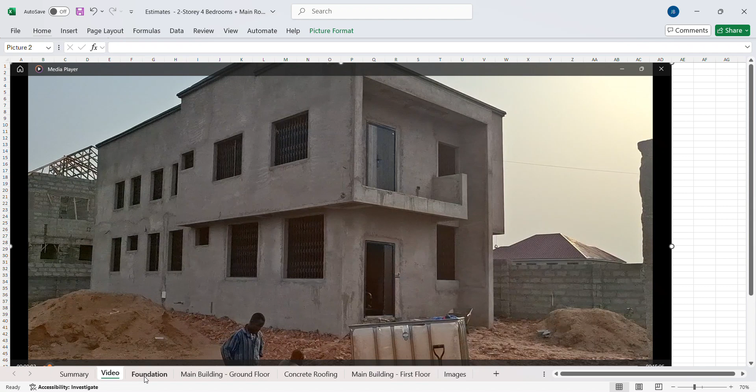So I uploaded a video of the building that you see in your shot on my YouTube channel, and I got a lot of chats, WhatsApp messages asking for the estimate. Indeed, I had promised in the video that I was going to share the estimate with you. So I'm going to go into the detailed estimate. I have the summary here, but before I get into the summary, I would take you through some images here.

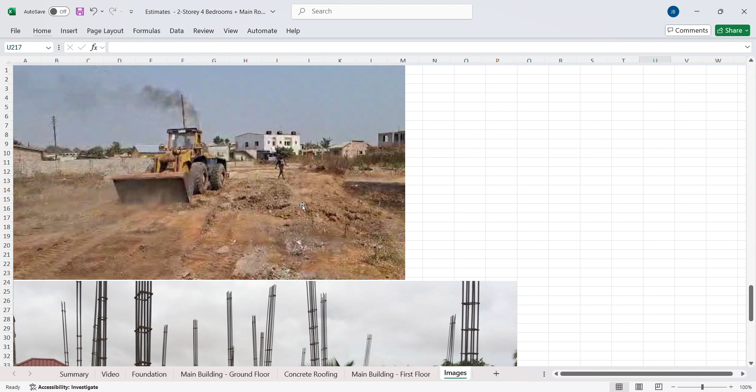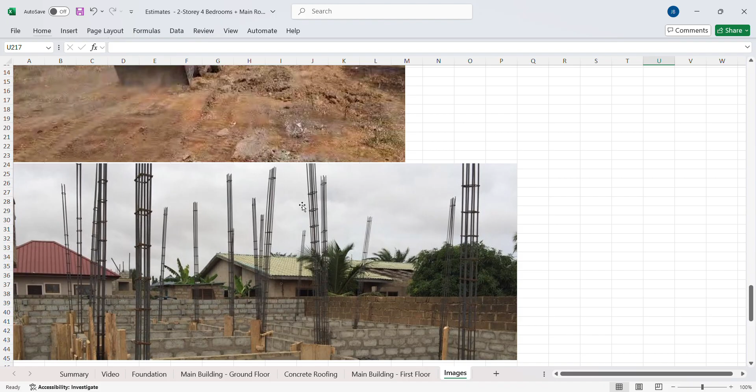Typically, we'll start the project off with some excavation works, but before the excavation works, we would have to grade the land. We have to clear and level the land. So this one will come with a cost. After that, we do the excavation. We pour what we call blinding. So this is the excavation that you see.

After the excavation works, we'll pour some concrete in the holes, and then we'll lay the blocks that you see in your shots. After the blocks, we would cast all the pillars. So I don't want to bore you with a lot of these details. Let's get into it. So typically we'll start by getting a trip of sand, a trip of stones. We'll buy some wood for the profiling. We'll buy some pickaxe, shovel, wheelbarrows that you can estimate to be about $800, which is 13,000 cedis.

And as I indicated, you are going to grade the land, very important, so that you get all your settings right. And there is a permit fee that you pay to the building authorities, so that is the assembly guys. And depending on where you are in the world, in my country, there are land guards everywhere. So before you start your building project, they are at your doorstep. The moment they see you with tools digging, they will come and collect what they call digging fee. So that you have to budget for. I have 2,000 cedis for them.

Then we have the profiling of the building. So this is where we set all the lines and say that, okay, these are the lines, this is where the blocks are going to pass. As you can see, there's a block here, there's a block here, there's a block there. That is the profiling. Then after the profiling, we have the excavation works. So this is where we dig the foundation itself.

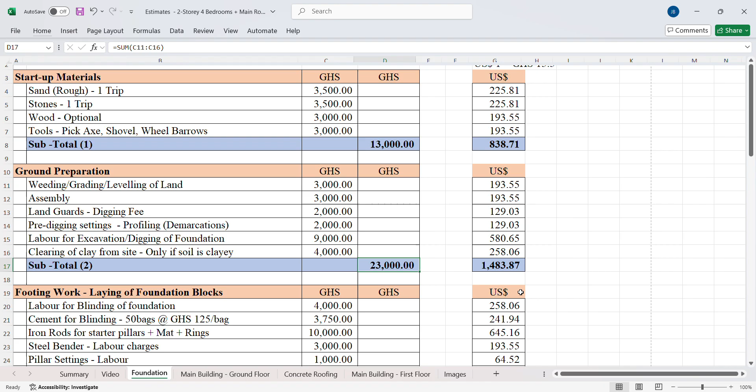Now, one important thing I always emphasize is if you do your excavation works and the land is clay, please clear all the clay from the site. If you look at your architectural drawing, you would find in there that the architect is saying if the soil is clay, please clear it from the site. So the ground preparation works is going to take us about 23,000 Ghana cedis to do, which is about $1,400. So we are building the estimate. I'll give you a very good summary of this.

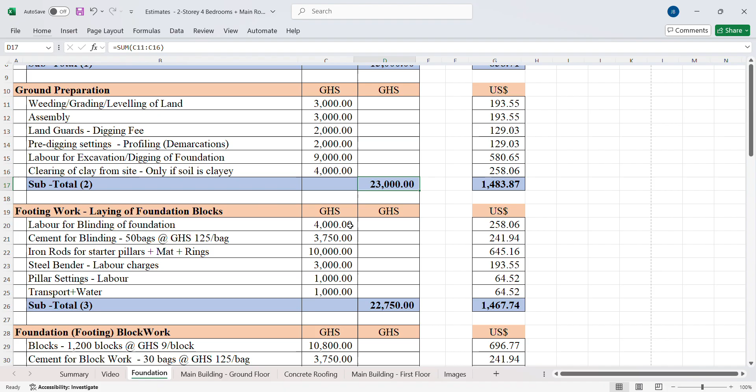Now, after that, you go to the footing work. So the footing work, we start with the blinding of the foundation. After the excavation works are done, let me just take you there. So after the excavation works, you've dug the trenches. You pour concrete in the holes before you lay the blocks. So these blocks that you see are sitting on top of some concrete we call blinding. That has to be done first before you can lay the blocks that you see in your shots. So once that one is done, then you can go ahead and lay your blocks.

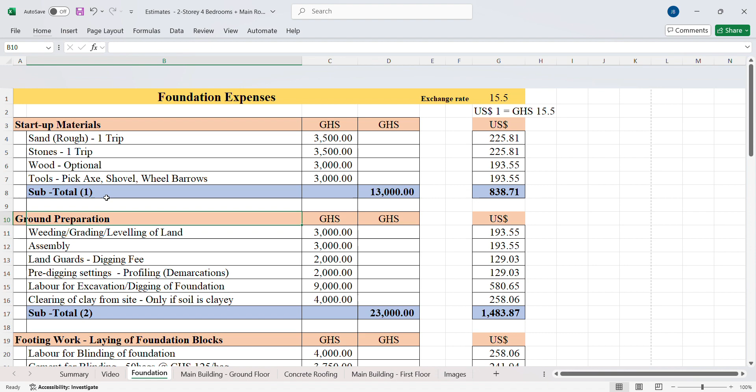Now the blinding, you would need some cement for the blinding. As I mentioned to you, it is concrete, but the sand and the stones, you have already bought them from the startup materials that you see at the top there. You have bought your sand and then the stones. So you would use that to do your blinding works.

And then you will need some iron rods. If you look at the image that I showed you, you see we have some iron rods in there. So this is the foundation that we just did. So this is the footing. We call this the footing works. So the footing works, you will need to put iron rods in there. So that comes with cost, and that is 10,000 Ghana cedis.

A ton of iron rods is 9,200, but you buy some 12 and it's a mixture of 12 and 16. The 16 is what we use for the columns. The 12 is what we used for the mats. The mat, you see mat in there. Then we buy 10 for the rings. So the rings will be 10.

So let me take you to the image again. So now here you see that there are rings on the columns that you see. And if you look at the bars, they are all 16. This column is 16. The column that you see is 16, and then the columns that you see sit on something we call mat, and then the rings around it, which is 10 mm.

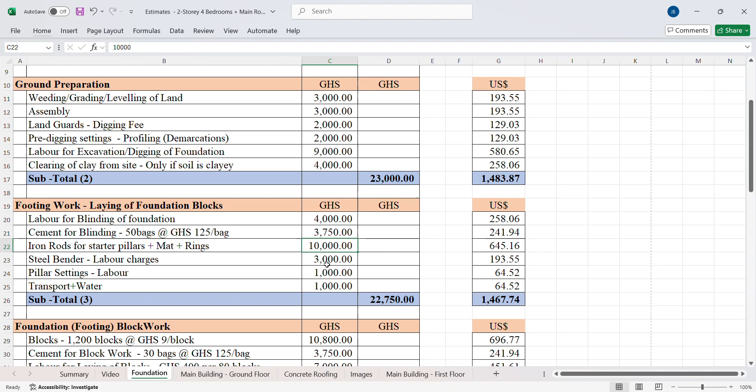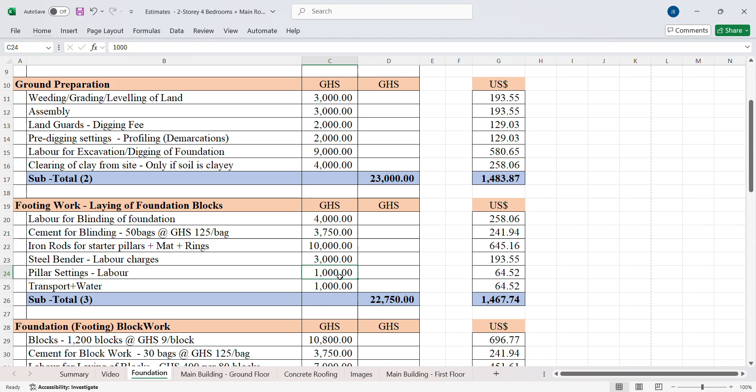So we continue with the foundation. Then the steel bender will charge you for forming those columns for you. And then your contractor will go on site and set all the pillars. And the pillars, some of them have to be positioned horizontally, some of them have to be positioned vertically. So that will be done. Of course, you will incur some transport and water charges, so you have to factor that in.

So that stage, up to the time you finish the footing works, we are looking at about $1,400 for this footing works. So we go back here. Then you now do the foundation, which is, of course, the blocks that you see in the footing work. That is what I mean. So these blocks that you see are part of the footing works. So you buy some 1,200 blocks for the structure that I showed you, for this building.

Now, one thing that I want you to pay attention to when it comes to the block work for the footing is the height of the foundation. It's very important that you raise your building at least 4 or 5 blocks above the ground. Now look at this footing. If you look at where the land is and the number of blocks above it, you see we have 1, 2, 3, 4 plus a half block, because that is the porch area. So 4 courses gives you about 3 feet. This is even before the casting of the foundation.

It's very, very important. Some people do foundation and they just do 2 courses above the ground level. It's not good at all, because you don't know how in the future the road is going to be done, how the shape is going to be, whatever is going to happen. Before you realize, your building has just sunk and you are always grappling with flooding issues. So we always recommend that your building is at least 3 to 4 feet above the ground level or above the road. It is very, very important.

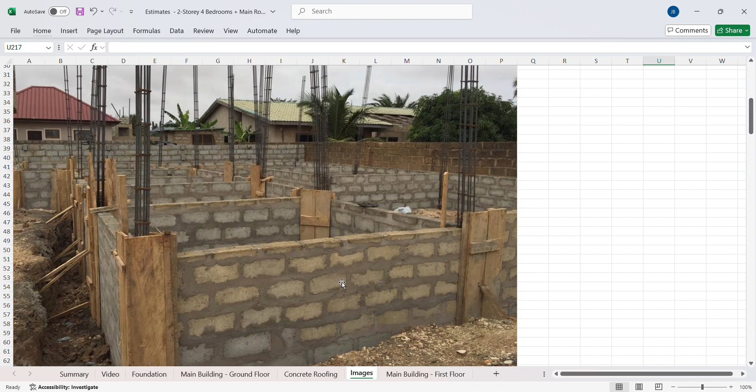So once that one is done, you incur some cost to lay the blocks, because of course the blocks have to be laid. It is not for free. So these blocks that have to be laid, you pay for them. That is here. After the block work is done, we have about $1,400 for that.

Then we go to the casting of the foundation pillars. So again, we go back to the image. You see that we have formed some woodwork around the foundation. Those pillars that you have put in the block work, you have to cast them. As you can see, there are some without. If you look at the ones on your right or the far corner, you see that they are without formwork. So that's how it is until you form the woodwork and you cast all the pillars.

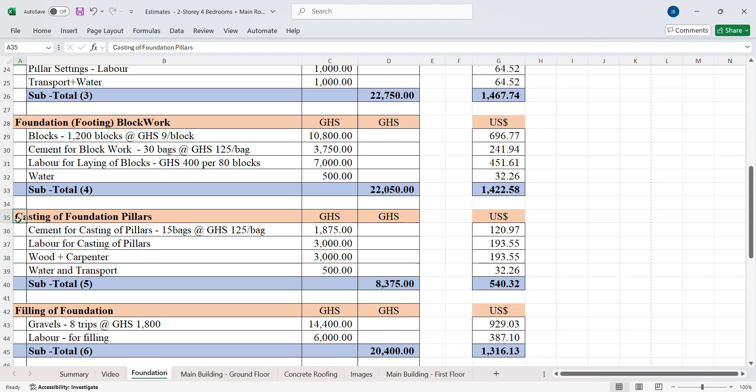So the cost of that is also there. We call it casting of foundation pillars. So I'm giving you the detailed breakdown. So that should be about 8,000 Ghana cedis. Then after you have cast this foundation, you are going to fill the holes that are in there. So these spaces that you see in the building, you fill them with gravel.

Remember, I told you. Now look at this side. If you look at the holes, you see that we have cleared the clay from the site. So there's no soil there. Whatever we dug from this land, we have cleared everything from the site to somewhere, and that comes with cost. That's clearing of clay from the site. It is in the estimate. Where is that one?

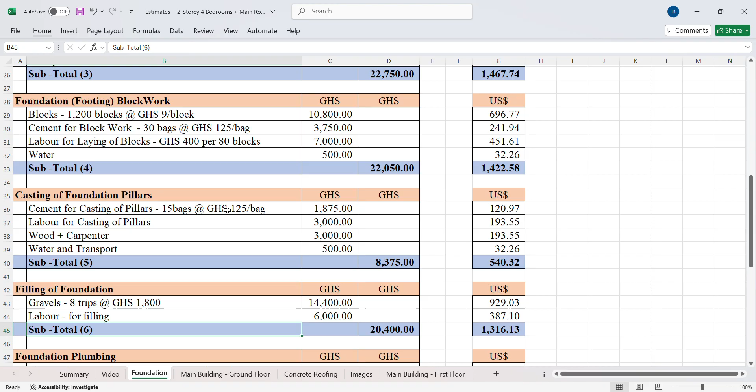After the excavation works, okay, it is right here. Clearing of clay from the site, if only the soil is clay. Now then you cast the foundation pillars.

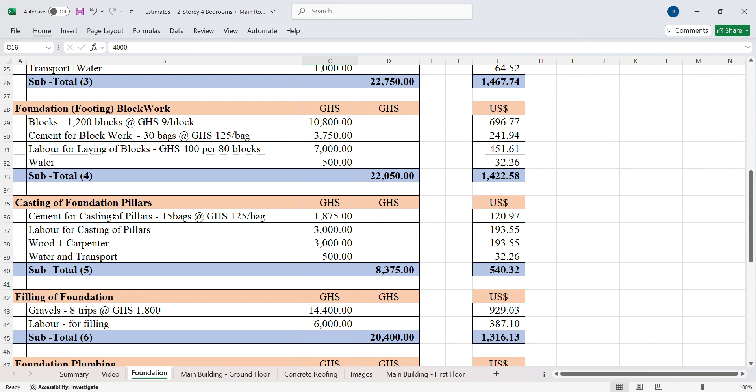From this image, you have to form the woodwork, pour some concrete in there. Because you have bought sand and stones already, you don't have to buy again. What you have bought is what you will use. And the wood you bought at the beginning, remember we bought some wood here, 3,000 Ghana cedis. It is the same wood we are going to use to do this.

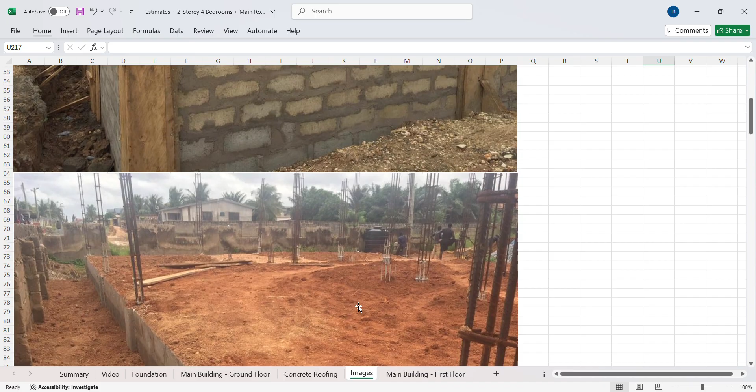Then after that, we are going to cast. So we are going to do the filling. So this is after the filling works. So this is the filling we have done.

We are done. After this stage, as you can see, the iron rods is 16 mm and 6 bars. Those of you who have been doing building projects and use only 4 bars, please stop. It is not good, especially story buildings. It is not good to use 4 bars for a story building. It's best to use 6, because the extra cost is not that much. It's not really significant. So please, if you want to do a story building, try to use 6 bars.

Now look at the soil here. This is gravels. It is not clay. You can see from the texture of what we have poured there. So we have filled the footing.

After you do this filling, now look at the cost associated with the filling. It's here. Filling of foundation. So it is gravels. We bought 8 trips. One trip is between 1,500 to 2,000, depending on where you stay. And the trucks will just come and offload, and you have to hire people to do the filling for you. That cost is well covered. So we have 20,000 cedis for the filling.

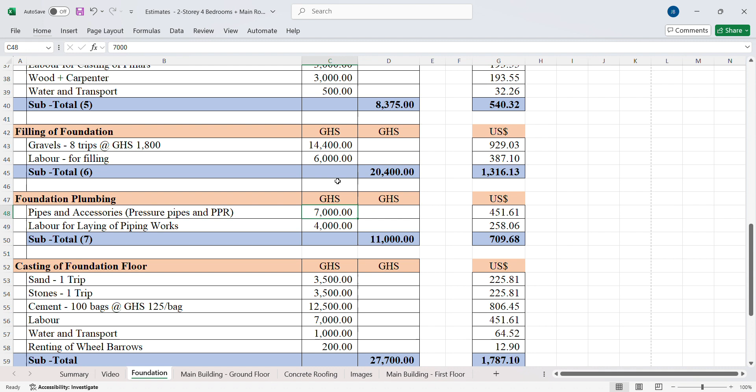Then you cast your foundation. Now after the filling, before we cast the foundation, the plumber will come and insert some pipes and what have you. Now here, let me stress this. Here, when you are laying your pipes, please, if you can, buy pressure pipes and use PPR as well, the green ones. Don't go and buy cheap ones. Buy pressure pipes. It will serve you very well. Buy pressure pipes and then the PPR pipes, and of course you pay the plumber for laying all those pipes.

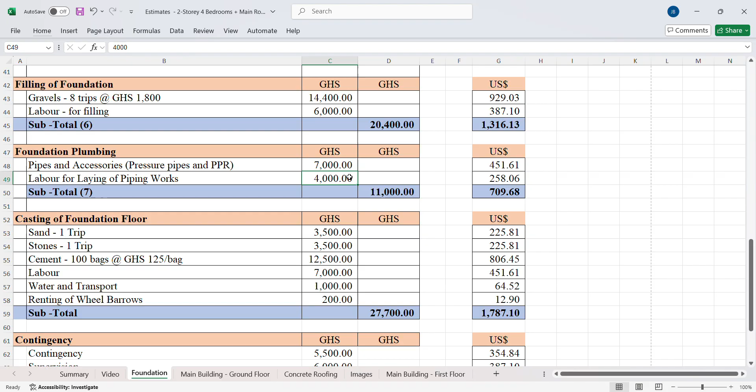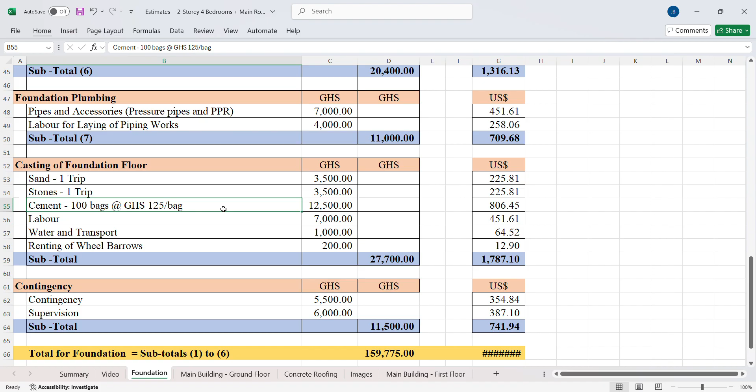Then after that, we cast our foundation. So casting of the foundation, that stage you will need an extra trip of sand and an extra trip of stones, because you have used most of the sand to do your block work and what have you. And the number of cement bags that you will need is about 100 bags of cement to cast it. So we have the subtotal there.

Building is like doing a wedding, in fact, or a funeral. There are things you will not even think of, but on the D-Day, those things will come up. So you have to have some contingency in there, and then supervision, what you pay to the foreman. This depends. Some of the estimates has built in the cost of the foreman already. So we are looking at about $10,000 for our foundation.

This one is using a rate of 15.5 for those of you abroad, using a rate of 15.5. So typically in my part of the world, when you are doing your foundation, you'll probably spend about $10,000, which today is about 150 or 160,000 Ghana cedis.

Now this one, I must emphasize this, because some of the clients that we have worked for, there are some people you send estimates to, they say it's high. You have to remember that the height of the footing plays a key role. Look at this: somebody will do a foundation and it's just 2 blocks above the ground level. So the cost will not be the same as doing a footing that is 4 or 5 courses above the ground level. So it is important that we pay attention to that. So when somebody sends you an estimate, ask the person, how many feet or how many blocks are you going to lay above the ground level?

That will inform what goes into the estimate, and it will also affect the filling you are going to do, because the deeper the spaces you have, the more filling you have to do. But for a quality job that is well above ground level, with a good foundation height and good columns where you have 16mm, 6 bars for each one, 160,000 Ghana cedis will do it for you, which is about $10,000.

Now after this stage, where do we go next? We have cast our foundation, cast the concrete, and we go to the block laying for the ground floor. Have you seen the height of the foundation? Look at the height of this building, how high it is, and that saves you from a lot of struggles in the future - your sewage and what have you, it saves you from them.

So now we go to the block work, as you see in your shot. Now this block work - we are done with the foundation, so we'll go to the main building. We'll buy about 2,500 blocks, they are here. You will need cement to lay the blocks, and then the labor for the block work plus sand. That should cost you about 47,000, which is about $3,000.

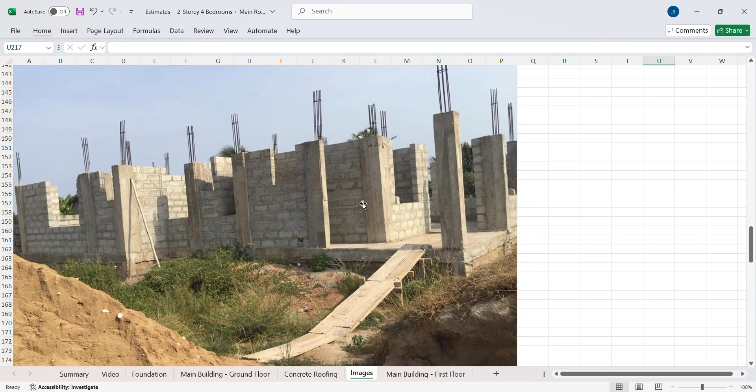Then you will cast the pillars, as you can see in the image. After the block work is done, you are going to put pillars in there and cast all the pillars, as you have seen. We've cast all these pillars - you can see these were projected pillars. Now we'll come back to the estimate.

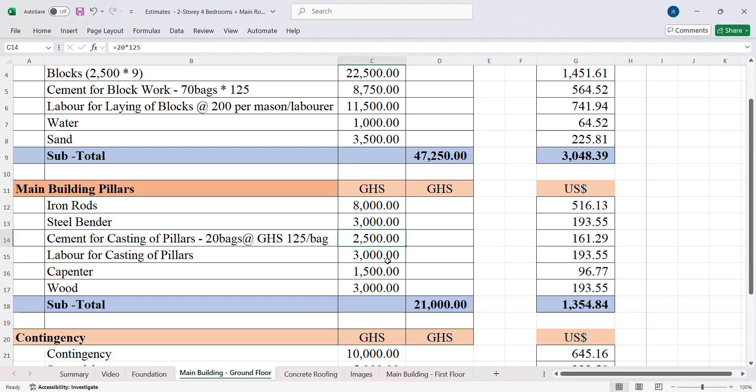For the ground floor, the main building, we are going to buy iron rods, as you saw in your shot. The steel bender, the cement for casting the pillars, the labor for casting the pillars, the carpenter for woodwork - this should be about 21,000 cedis. Again, you always have to put contingency and supervision in there. So the ground floor should cost you about 83,000, which is about $5,000. By the time you are done with your ground floor, you would have spent about $15,000.

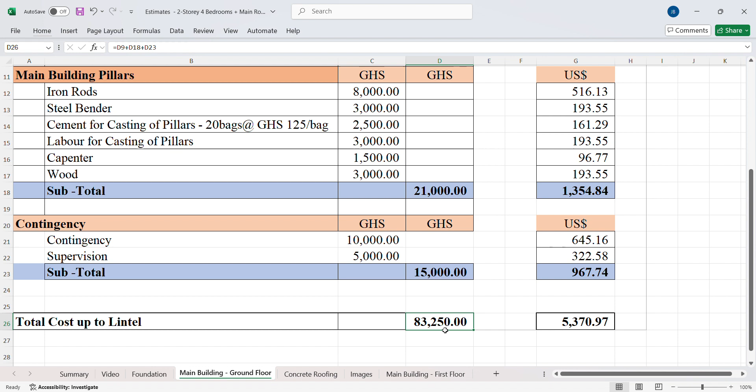Then we go to the decking of the ground floor. This is the main building, but before you go to the second floor, you will deck it - you will do a concrete floor. Now, the budget here is 190,000 Ghana cedis, which is about $12,000. Now, what do you need?

For the concrete floor, you will buy iron rods. You will need about 6 tons of iron rods to do a quality job for this kind of structure - 6 tons to do a very good job. 16mm, you use 6 bars. I've told you, when you are doing your beams and your columns, 16mm, 6 bars - you don't compromise on that. The steel bender will charge you about 15,000 cedis to do that work.

Then we have the wood, the materials that you buy. This is one of the costs that is so difficult to bear - budget about 40,000. But if you are lucky, you can get some wood to rent and it will reduce the cost, and after you finish, you can also sell some of the wood. You use some to do the top, but you have to budget at least 40,000 for the wood, and about 17,000 for the carpenter that is going to do the form work for you.

Very important - then the plumber will also come and lay some pipes before you do the decking. I'm going to do a video on decking alone for you; there are some things we all need to understand, it's very important. Then there will be some electrical pipes, and the labor for the casting of the concrete will also be there.

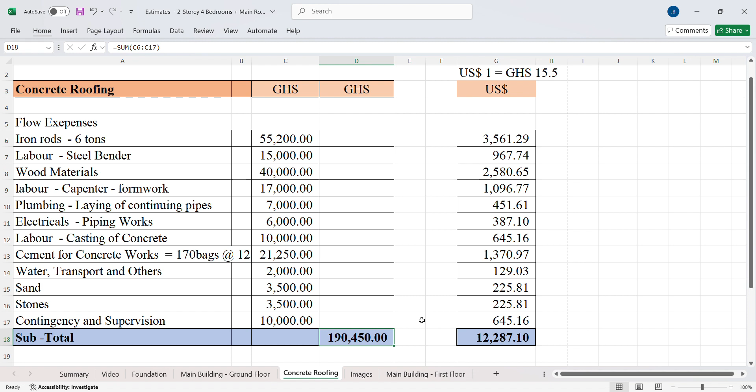You need about 10,000 cedis for labor. Then cement for the concrete works - to do a good decking, you need about 170 bags for this kind of building, to do the concrete flooring. Then you have 2,000 cedis for water, transport and others. You buy a trip of sand, a trip of stones, and then contingency. So about 190,000 can do a quality, top quality decking for you.

Then we come to the main building, the first floor. So now we are done with the ground floor works, we come to the first floor. So the first floor, what are the key things that we need to cover?

We are going to buy blocks, about 3,000 blocks. Now here the blocks are more than the ground floor because after the lintel level, we have to lay the continuing blocks and pick our height for the roofing, taking care of all the things that will come there.

Then the cement for the blocks, about 75 bags. Now there's something I want you to understand here - the price of cement has gone up, it's now about 125. If I had my own way, I would advise that as much as possible, if you can use 42.5 throughout your construction, use it instead of the 32.5. The 42.5 is stronger, is better, it gives you a bit more. Even though it's 125, it gives you better quality work. Even though most people use 32.5 for the block work, if you can use 42.5 throughout, use it.

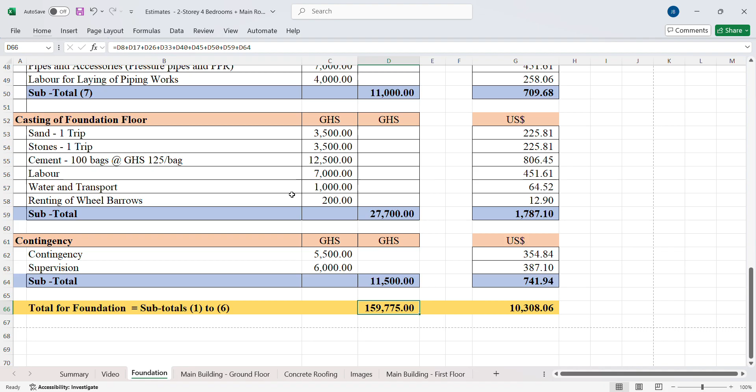Let me mention something before I go on. When you start your building project, the foundation, all the sand you buy should be rough sand. This is something I have to stress on - I've seen a lot of people abusing this, sometimes they say medium or what have you. If you can get river sand where you are, fine. If you cannot get it, make sure you use only rough sand for your foundation. The only time medium will come in is when you are doing your plastering work, like what we have done here. But throughout the process, everything should be rough sand. So when you call your tipper trucks and you want sand, please ask them to bring you rough sand.

So we go back to the main building. So we have the labor - the masons charge 200, the laborers also charge almost the same. So that block work side will cost you about 56,000.

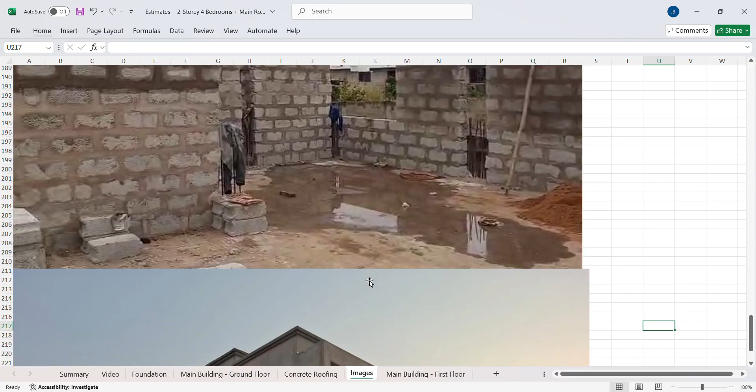Then after that, you will cast the pillars again. So at the top level, you are going to cast additional pillars. So that side will cost about 25,000.

Then we go to the lintel beams - there are beams that we are going to put on the windows and the doors. We cast that one before we continue. So you have to budget about 20,000 for that.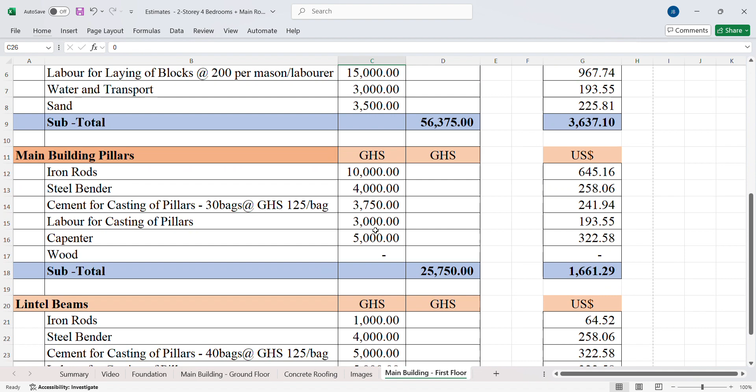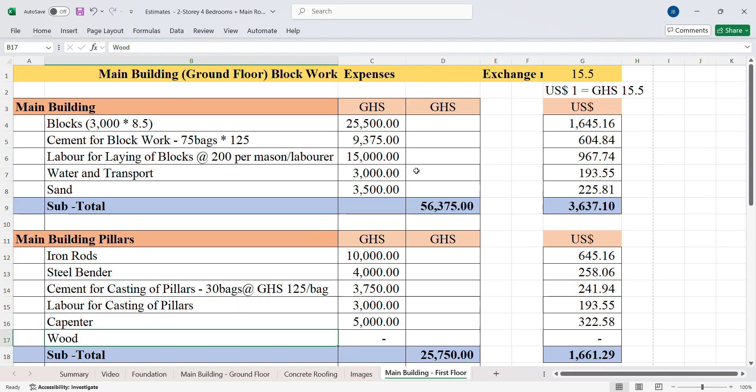If you look at the estimate I have here, you'll see that for the main building I didn't put any wood there, and the reason is simple - there's no wood there because we already have some wood that we used for the decking. So you leverage on that wood and do your pillars. Then after that you come to the beams - we have that here, the lintel beams. Then you continue with the block work, it's already been factored in here, and prepare it for the roofing.

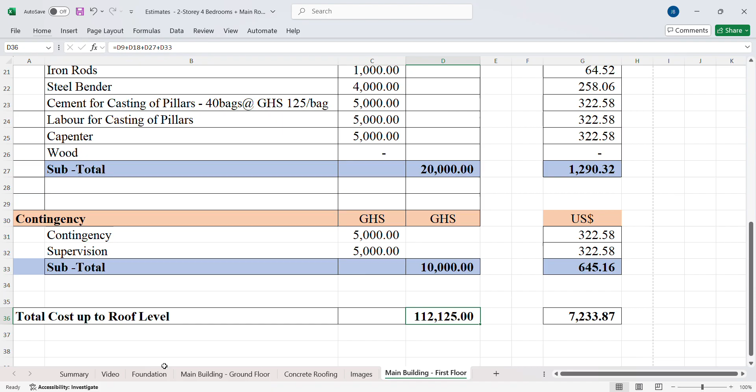So again, contingency and then the supervision - that sets you back 112,000 Ghana cedis. After that, you are ready to do your roofing. How much will it cost you to do your roofing?

So let's look at the summary. The foundation, we said 159,000, that's about $10,000. The ground floor block work should be about 83,000 Ghana cedis, about $5,000. The concrete decking about 190,000, $12,000. The first floor column, the lintel beams and what have you, everything about 112,000 Ghana cedis.

And then roofing - for the roofing, you can use trusses if you want to. I had an image of the trusses, I think I've taken it off, but you can use trusses for the roofing.

Is good. And then the roofing sheet and the installation, about 40,000 for that kind of structure. That is hidden roof. If it is the traditional roof, you may have to add some extra 20,000 to 30,000 for the traditional roof. So with about $40,000, we can do our structure.

Somebody was asking me for an estimate for the finishing. The last time that I shared a video like this, about 2 years ago, there was a request for the finishing. Now, I have a bit of that I'm going to share with you. So for now, we have 615,000 Ghana cedis, and then how much here? About $40,000. That is using a rate of 15.5, depending on where the rates get to. I think the last estimate I shared about 2 years ago was just about $40,000. So in terms of dollars, it hasn't really gone up that much.

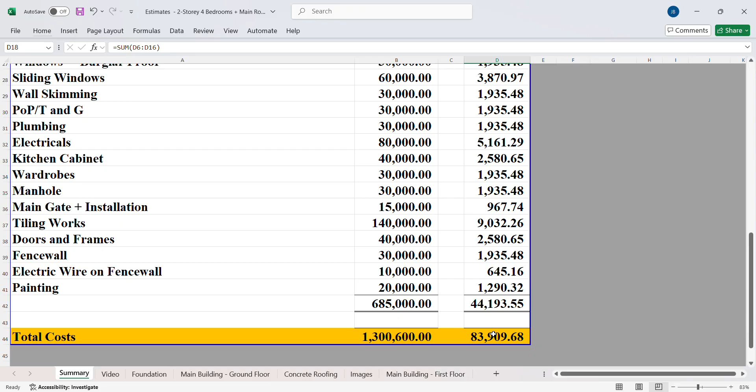But then this is what we have. So I'm not going to bore you with a lot of details when it comes to finishing. I always say finishing is according to taste. But typically for your plastering and dressing of the windows, beams and columns, you can budget about 70,000 Ghana cedis. For your burglar proof, you can budget about 30,000 Ghana cedis. For your sliding windows, you can budget about 60,000 Ghana cedis. For the wall skimming, the white one, the POP wall skimming, you can budget 30,000 cedis.

Then the POP and the TNG, I've just put 30,000 here, but you know, POP, we have different styles, different designs. Somebody will go for something very wild and may end up spending like 60, 80, even 100,000 Ghana cedis. Some people like nice things, if only you can afford, but this should be able to get you something decent. The plumbing works, again, it depends on your taste. Some WCs will cost you like 2,000 cedis, some will cost you 5,000 cedis. So it all depends. The electrical works is there.

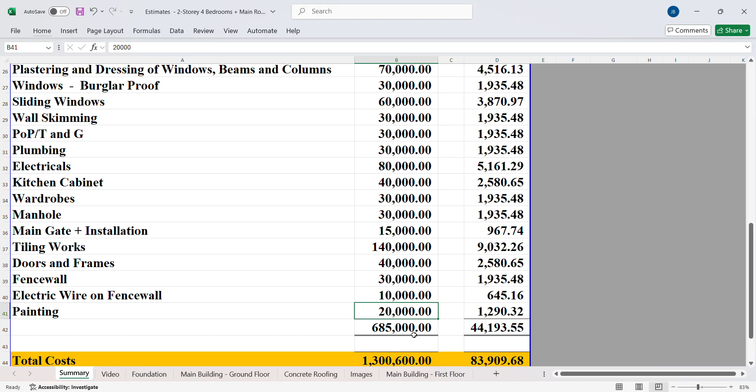You have to think of your kitchen cabinet. The kitchen cabinet can range from anywhere between 20 to 100,000. Again, depends on your taste. Same with the wardrobes. The manhole, you have to fix your manhole. You have main gate and installation of the main gate. You have your tiling works that you have to do, beautiful tiles. I'm going to share more details on this. The doors and the frames, your fence wall, your electric wire on the fence. So the small thieves will not come and disturb you that much. The painting works. If you have about 700,000 cedis, you can do a very decent finishing.

And of course, with about 80 to $90,000, you can have a beautiful 4-bedroom house with a very nice finishing. Please, the estimate that I have here doesn't include furnishing. There's a difference between finishing and furnishing. The finishing is what you see. The furnishing is when you buy your furniture, you buy your bed, and what have you. Those things, of course, you have to sit on a furniture, you have to sleep on a bed. So those ones are the furnishing things, the lighting system and what have you. So there are also those ones that you have to take care of.

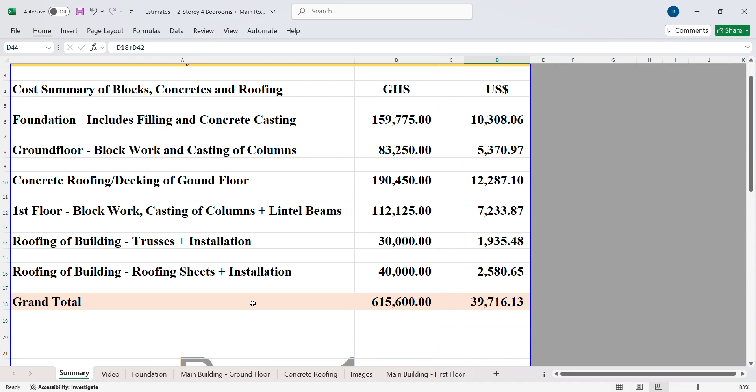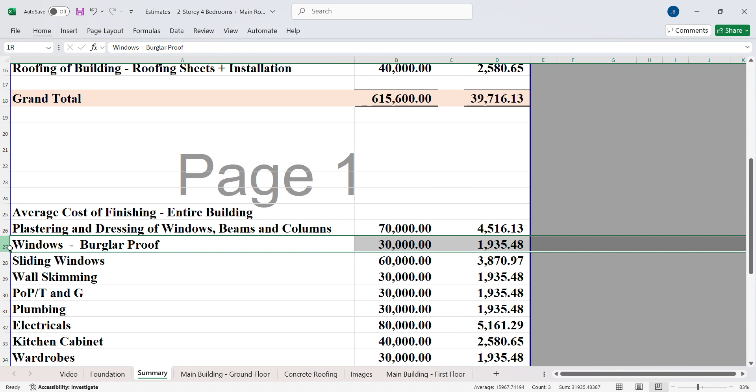So for those that requested the estimate of this building project in your short, please, you can look at what I have shared with you. So that building you see in your short, we have gone beyond just the first stage. We have started the finishing works. As you can see, we have done the plastering works. So that's the estimate. We have done the burglar proof. The sliding window is ongoing. The wall skimming is yet to start, but some plumbing works have been done. Some electrical works have been done.

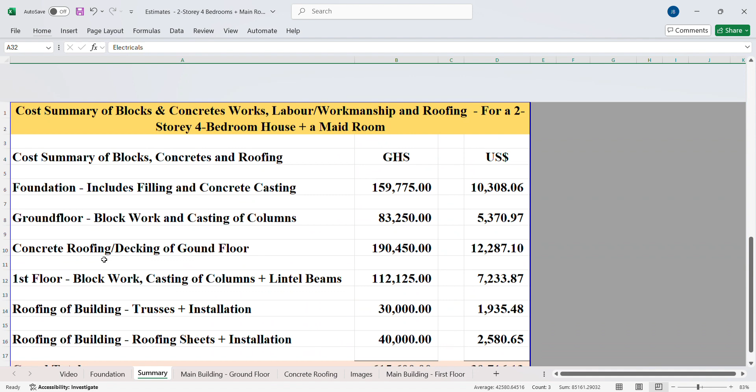Please, I left out the air condition. That is why I said I'll come back to the finishing later, but this gives you a very good idea. You can budget another 80 to 100,000 cedis for air condition. So I'm going to share another estimate with you on the finishing, but this gives you a very good guide. Probably what is not here is the air condition, which you have to factor in the building project. And so my next finishing video will talk about that one.